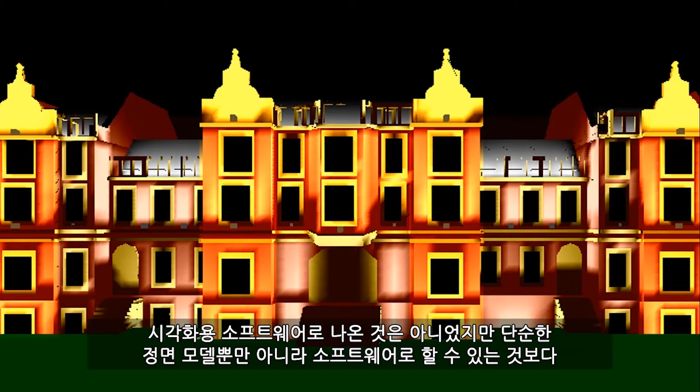We started to push the software a little bit. It was never really intended for visualization, but we started to create simple facade models, or more complex facade models than the software really allowed, because all it would let you do is build square blocks and really basic geometry. So you end up with these sort of Minecraft looking buildings that you build the best you can with the limited geometry that you have.

But again, it was still radiosity calcs. So it was better, and it was a bit quicker than doing it all by hand with pastels and chalks, but still lacking a little bit of depth in realism.

Then fast forward a couple of years, I discovered ray tracing. Ray tracing became a capability in the software that we were using at the time. And this was a game changer for me. I just couldn't believe I'd not come across ray tracing before. It'd been around for a while, but I'd just never come to use it in any software before.

Suddenly it was getting beautiful, accurate looking falloff and light pattern and shadows on surfaces. And yeah, you can see the difference there. It's still pretty primitive geometry, but you're just getting a little bit more of a realistic look and falloff of the lighting. Okay, and we continued to push what we could do within the software.

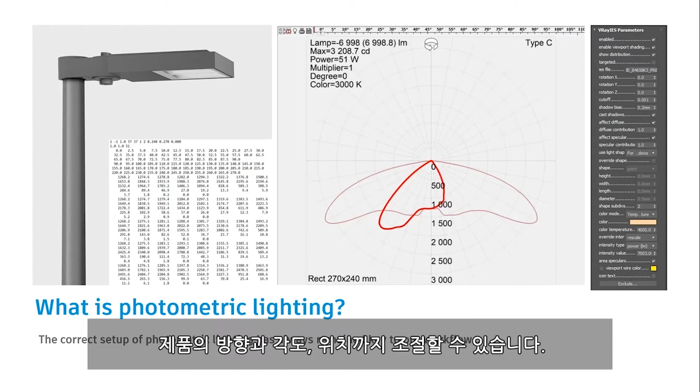Okay, so once we put that into 3D Studio Max, there's all sorts of different elements we can control. We can set up its lumen output, so that's the amount of light power that is output by this light product, and that depends on the different types of lamps being used. Then the color temperature of that product, so it could be a warm color, a white color, or a cool color. And we can also affect the orientation, angle and positioning of the product itself.

So we have guidance we can use, because there are known reflectances of materials such as stone, wood, and glass. And it will vary depending on the type of wood you're looking at or the type of surface finish on that wood, whether it's glossy, satin, or matte, the color of the grain of the wood itself, and so on. And even the age of the wood can affect it. So these are all things that have to be considered.

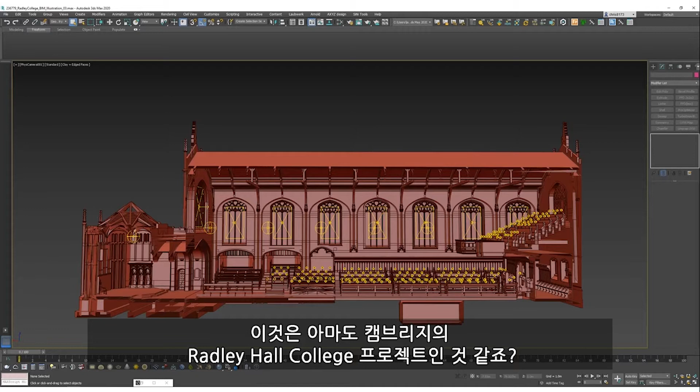But typically, we come across this kind of thing. So this is actually a project, Radley Hall College at Cambridge. Is it Cambridge? That's correct. Yeah. So this was actually a Cambridge project. So we actually sent this model. The model's great. Model's made up of the space once they did a survey of it, but the attempt was

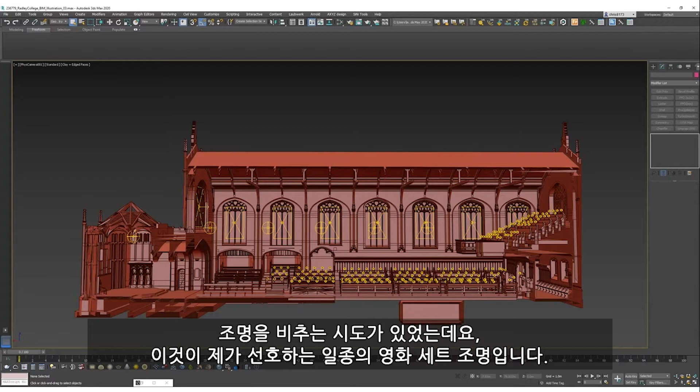made to light it, and this is what I like to refer to as film set lighting. So somebody's made an attempt here, you can see, to put in fill lights that come in from the outside. So there's daylight coming in, and then generally make sure the space is well lit. So you've got those area lights down the center of the space, and then where you've got these little lamps that are on the benches on either sides, again, they've used some area lights to represent each one of these lamps.

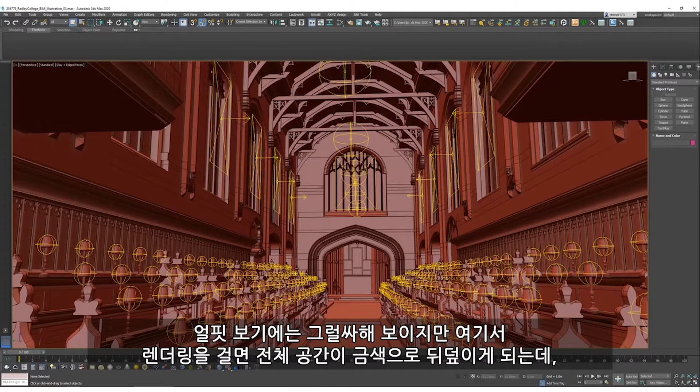And at first glance, that looks okay, but when we take a rendering from that, you end up with quite an overblown space because there's basically just too much light in there. It's not accurate based on where the actual positions of lighting products in that space would be. But then also a lot of that washed out look is because the diffuse settings of the materials haven't been taken into consideration there.

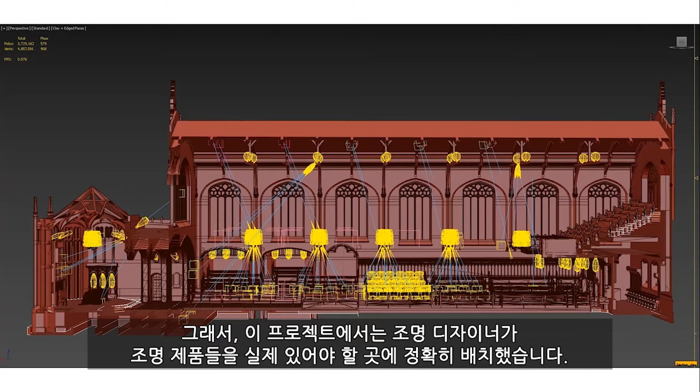So on that specific project, once we've gone through this with the lighting designer and placed products accurately where they should be, you can see that suddenly there's a difference. Everything seems to have a purpose as to where it's being placed. You've got light in the center there, which are aimed at specific parts of the walls. You've got lights on the suspended chandelier products and so on.

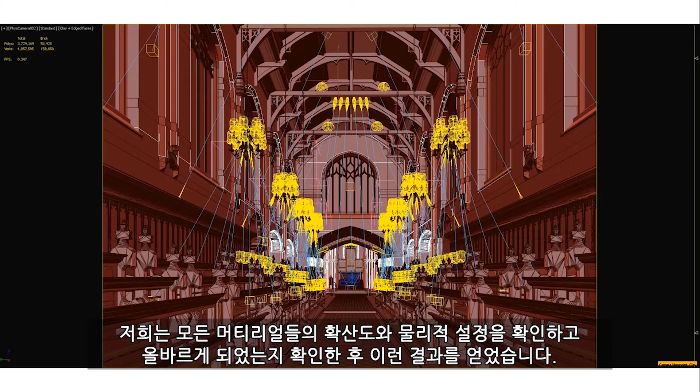And again, we'll also go through and check all the diffuse levels and the physical setup of the materials, and the result that we get once that's been done with everything checked and correct, you can see it's a very different experience of that space, and the representation of that lighting in there gives you a much more believable or a much more accurate representation of what that space is actually going to look like once it's been completed lighting wise.

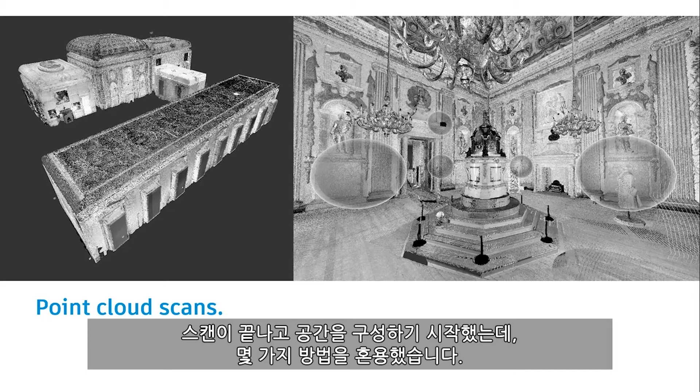Once we had those scans, the next part of the process was to start building up the space. So we did this in a combination of ways when we started building this geometry. Most of this was done by Chris, but the first technique we used was to manually build on top of the point cloud. So it's just like tracing or joining the dots: simple structures and architectural elements in that space, built up using the point cloud as a guide for positioning and heights of extruded objects and geometry until you fill it all in slowly.

Yeah, as you say, it's like tracing, but it doesn't really speed up the modeling process, but it kind of ensures accuracy, I guess. Like you can make sure scales and everything are as they should be.

They should be the correct scales. So it's really useful for detail, like heavy detail on ceilings as well, because obviously you can't get up close to those when you're there in person, but the 3D scan will get that detail for you.

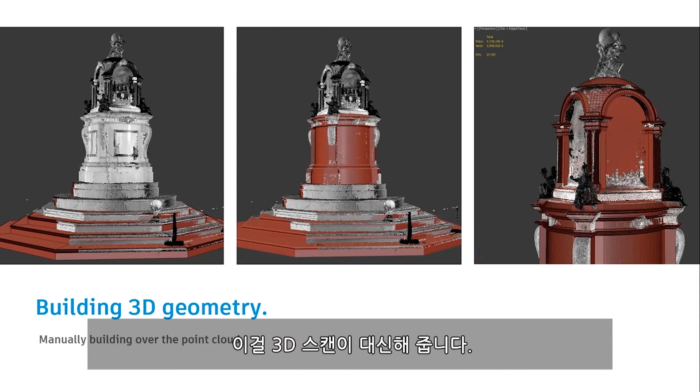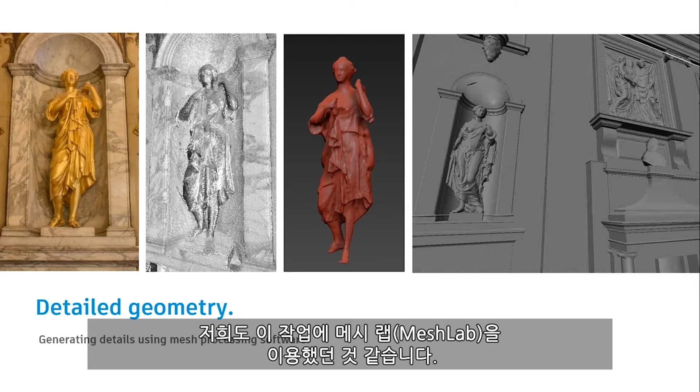That's correct. So as well as that, some of the really heavily detailed items in that space, like that statue, for example, were a little harder to model using the point cloud. So the way those were done was using mesh processing software. I think we used MeshLab for this at the time. Yeah, we did. As you can see, it's quite a dirty method of creating geometry, but it was good enough for the statues there, especially once we applied textures to them, you can barely notice.

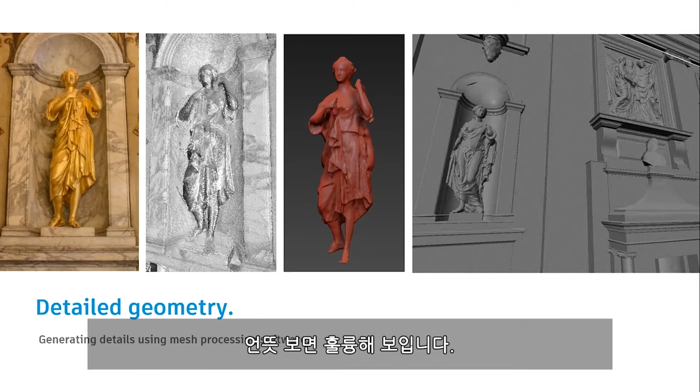You see the statue there on the left, and then you see the point cloud. Obviously, the point cloud didn't capture so much of what was going on behind the statue, or there's bits like feet and things missing. When we ran it through some processing software, we were able to get that clay version there. At first glance, it looks great. If you really analyze it, then you notice things like, oh, there's a bit of foot missing, or there's not as much detail maybe in some of the clothing, etc.

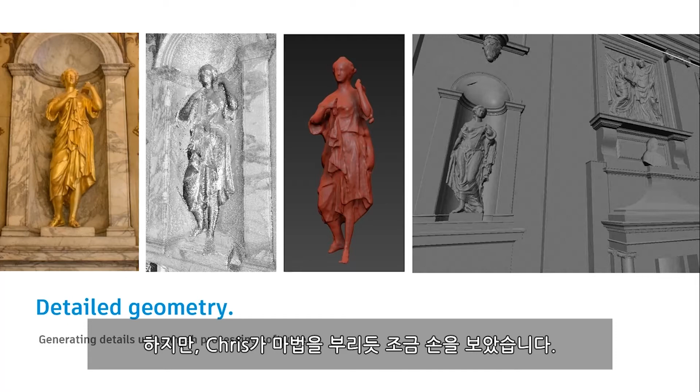But once Chris does magic on it and cleans it up a little bit, and once we have placed the textures onto it as well, then it becomes really quite hard to perceive that there is anything different to the original. And you can see here, this is some of the detail that was on top of that central clock feature in the middle of the space.

Yeah, so as I say, it's quite a dirty model that you get out of the processing software, but just some simple cleanup. It doesn't have to be perfect or accurate. Well, obviously accurate is important here, but like the actual volume, as long as we fill the volume that's there, that's the most important bit. And obviously, depending on where the camera is positioned in the space as well, is kind of how much detail we need to go into. And then we can use textures to add in the extra detail where necessary.

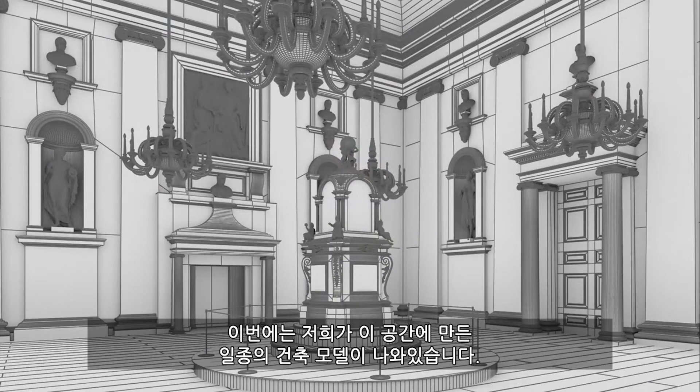Okay, so here you can see the architectural model that we generated then of that space. So we've got all of the base room in, we've got the details in for those elements, the ornaments in the background, the detailing around doorways, and the feature clock in the middle, and we've got the chandeliers in as well.

So from here, the next stage was to put in the materials and build up using a lot of photographic reference for this space. We were quite lucky when we went to the site, weren't we, Karen? Yeah, we actually got a chance to take a lot of photographs for our reference as well, and we were able to take them in a way that the exposure for the images was just right for us to use them as textures as well, trying to remove as much of the existing shadows as possible so we could actually use them.

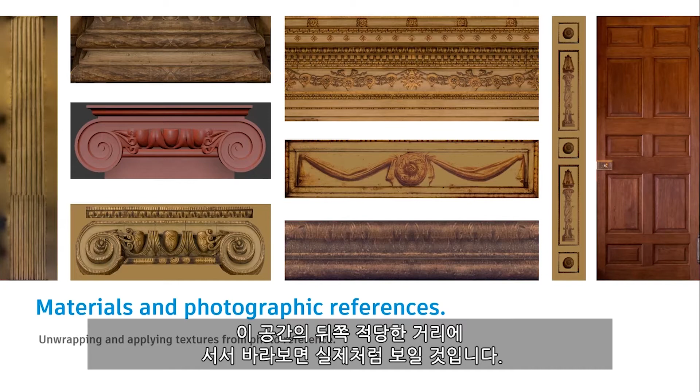And then it was just the process of unwrapping the geometry so we could place the textures on accordingly. And you'd be surprised how much you can actually get away with where things aren't absolutely perfectly lined up. But from a certain distance, as long as you've got them within 95, 98% accuracy, they just look like the real thing once you view them from standing back in the space.

So there's just a few there that we showed you, but there's literally hundreds and hundreds of images taken and hundreds of elements chopped up in Photoshop and placed onto that model. So that's the scene. You couldn't actually go in there and take one image of the entire ceiling. I can't remember how many. It was like 5 or 6 images stitched together, I think, in the end. That's right. To try and get a flattened version of it, which we could use. Yeah, and to try and get as high a resolution map as possible. And then that's just applied to the inside of that ceiling space.

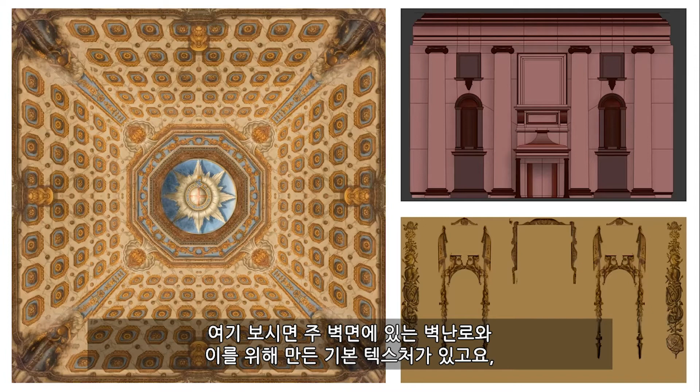Then you can also see one of the main walls in the space there where the fireplace is, and the base texture that was created for that, with all of the painted details on those walls and columns. And meanwhile, while we were getting the model ready and textured, our specialist lighting team was also working on the lighting design for this space.

So if you remember, I mentioned before that the aim of this client was to try and restore the ambience or the feel or the mood in that space back with the lighting to how it would have been when it was originally lit just by candles. So we headed down to Kensington Palace for this candle trial, they called it.

And Chris and I have worked on quite a lot of different types of heritage projects like this, and we know the level of detail that stakeholders and clients can go into when they're making decisions on things for these spaces. They're very sensitive spaces. They're hundreds of years old, and they belong to important people, or they're used for important things. So a lot of time, effort, and a lot of input is required from a lot of stakeholders to make decisions. But this just took it to another level, right?

For us, big deal for them, wasn't it? I mean, it's a really big deal. Like it's the first time they lit a candle in the space for hundreds of years. So exactly. Obviously, though the space was originally lit just by candlelight, and the candles were specifically just on these chandeliers, they can't do that for obvious reasons. That can't be done today. You couldn't have candles lighting up this space and visitors coming in and out. The risks and the hazard that would cause, it's not going to happen.

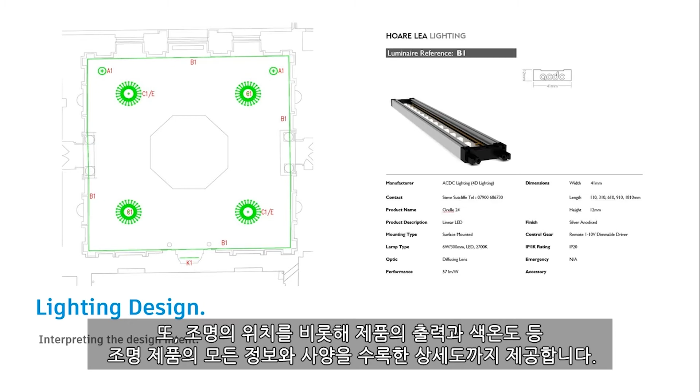So the output, lumen outputs of the products, the color temperatures, etc. So we'll populate that into our model. You can see there's that linear fitting and where it's positioned exactly underneath the ceiling on the cornice at the top.

And this is a really good example of working on something that's bespoke. So the lighting designers worked with the company that was restoring the chandeliers, or there was some repair work to be done on some of the chandeliers, I believe. But they wanted to also integrate this fitting of spots. So there's a ring of spots. It looks like a spider there. You can see it on the left.

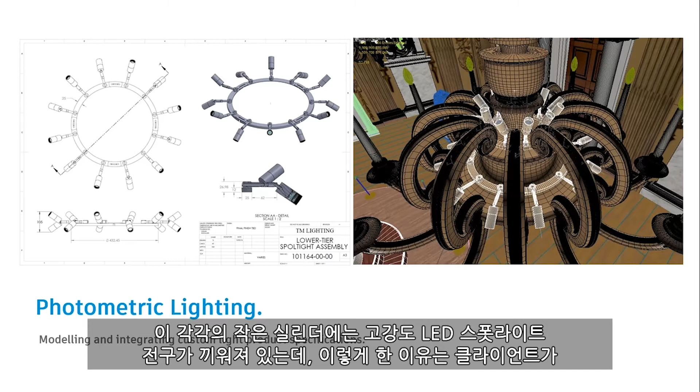And it's colored the same material as the chandelier itself, but then also it's hidden in between those arms in such a way as to hide it best we could. So each one of those little cylinders that you see holds a high intensity LED spotlight.

And the idea for this was because they wanted to make sure that there were no spotlights to light all of those statues and busts and pieces of art that were around the space. They wanted to make sure there was nothing visible or mounted onto any of the surfaces of the architecture. So by hiding them on the chandeliers, you could aim them at different elements.

So here's a drawing that the lighting designer gave us saying, okay, we've got 4 chandeliers and we've got these rings on each chandelier. And this is sort of where we want to aim products to. So Chris and I had a great time trying to figure out which arrow points where and where it comes from. But we did a rough setup to point best we could these spots from the chandeliers to those particular different elements within the space.

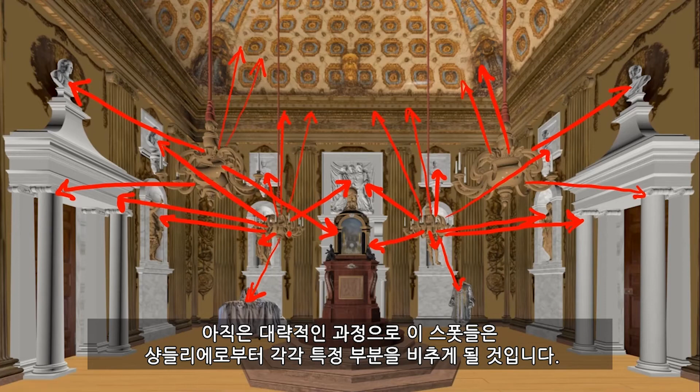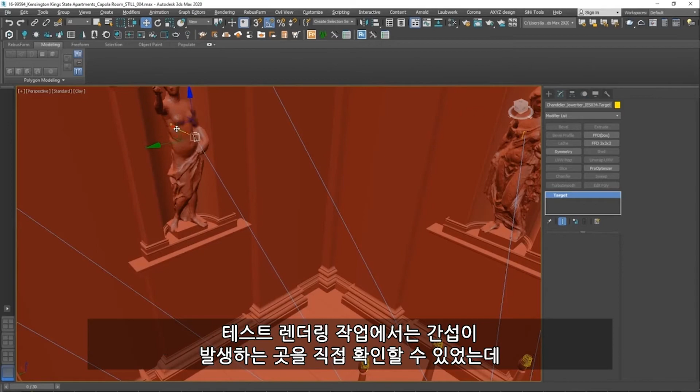Here's a video showing how that works. What was really good about doing this in 3D Studio Max was that once we parented up the light fitting to the spot, you can see it follows wherever we aim it, but we could position it and aim it towards a statue, for example.

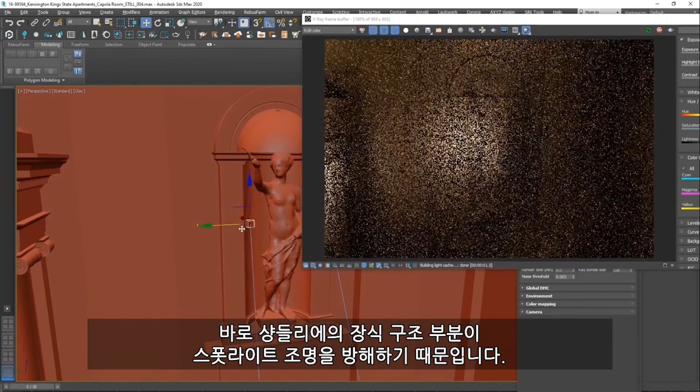And when we do a test render, then we could straight away see whether there was clash happening, i.e. is there an arm of the chandelier that's intersecting this light beam, and you can see there's a dark shadow on the side of that statue there, and that's being caused by one of the arms of the chandelier blocking the light beam from that spotlight. So yeah, you can see the image there as well that shows it.

So this way we were able to then choose a different position or a different spotlight from one of the other ones. Maybe we choose one from a chandelier across, or just one from the next arm down. So from that we were able to work through all of those spots on each chandelier and figure out exactly which position we needed to place a spot and what angles of aim we needed to set it to light just the required elements of statues and artwork in the space without causing shadowing from the arms of the chandelier itself.

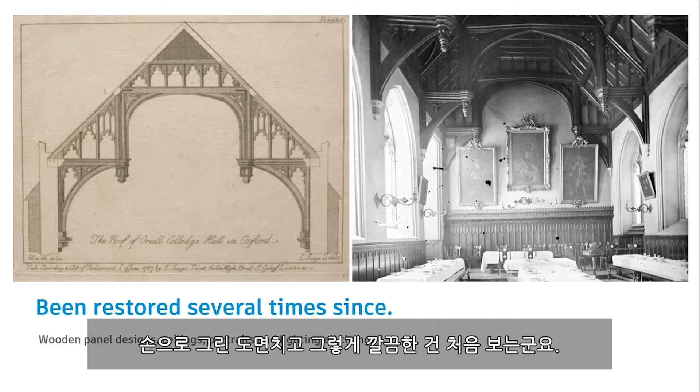And there were some great ones for this one, weren't there, Chris? Yeah, some fascinating ones. I can never read the handwriting because it's always so neat. Not like my handwriting, unfortunately. Everybody could write in calligraphy back in the day, couldn't they?

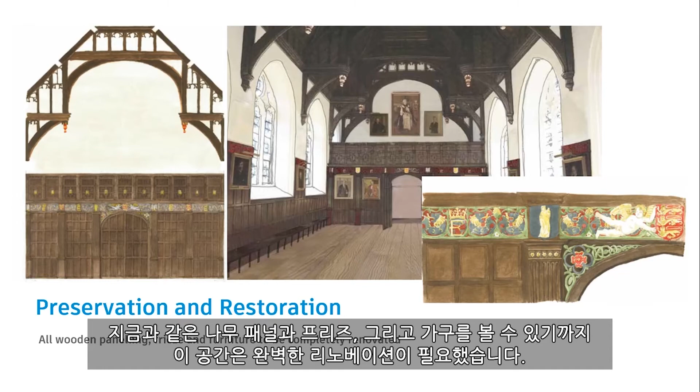So concepts were drawn up by a couple of architects, actually, of how this space could look if it was preserved. The wooden paneling as it is now, the frieze and the furniture were all going to be completely renovated. Also, they were going to rehang all the portraits, actually taking down quite a lot of the clutter on the walls and reducing the number of portraits in total in the space, but also bringing them down so that they're more eye level, so people can actually see some of these portrait paintings.

As well as this, there's going to be an updated lighting scheme put in, mainly to focus on hiding as many of the fittings as possible for minimum visibility, to make it a bit easier to maintain as well, because some of these fittings are so old. It's quite difficult to get the actual parts to fix them if they do break, and also to provide a better quality of light in the space as well.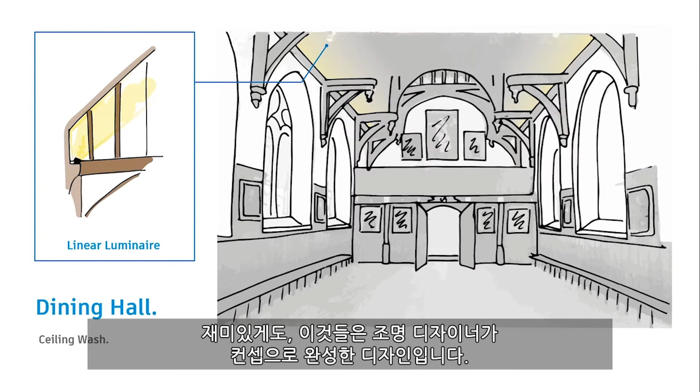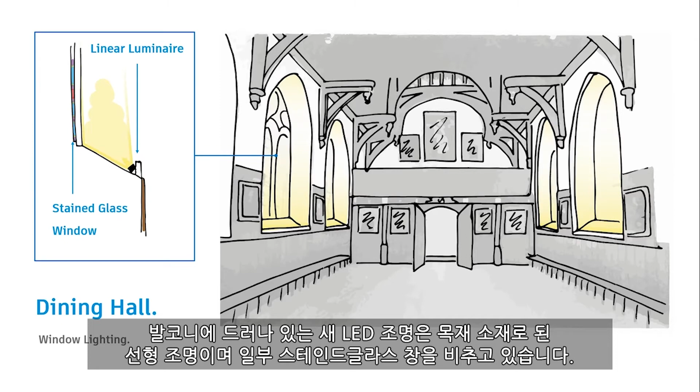So just for your interest as well, these are some of the designs that the lighting designer came up with conceptually. So they wanted to have a ceiling wash in there, some new LED picture lights, LED linear fittings to bring out the timber details on the balcony, and also to bring out some of the stained glass windows too, as well as actually having some proper task lighting, some downlights to actually illuminate the floor.

Also, as I mentioned before, task lighting was quite a big thing for them, because at the moment they have lamp fittings on the actual tables, but they're hardwired in, so they can't actually rearrange the tables in the room at all. So the idea is that if they have a battery powered table fitting, they could rearrange the tables and use the space for other things other than just sit-down meals. They could have concerts or exams in there. That's what they really wanted to do. They wanted to repurpose the room.

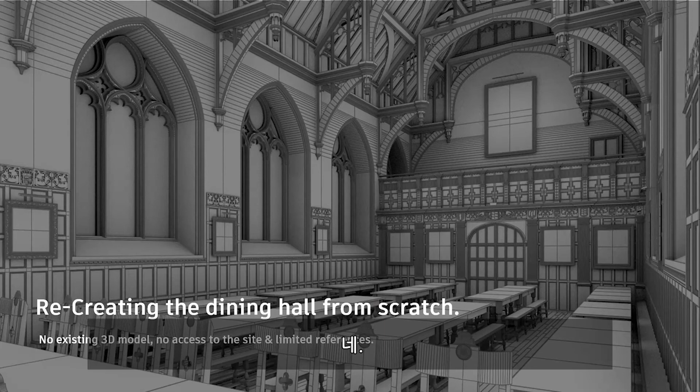Yeah. So when it comes to recreating the dining hall from scratch in 3D, it was quite a challenge for this job in particular, because we did this project at the beginning of lockdown with COVID-19, so we couldn't actually go to the site and see it, which, for doing lighting visualization, is really handy, to go and see it with your own eyes. Unfortunately, with this job, we had to deal with whatever we had in terms of reference photographs, which were generally taken on mobile phones.

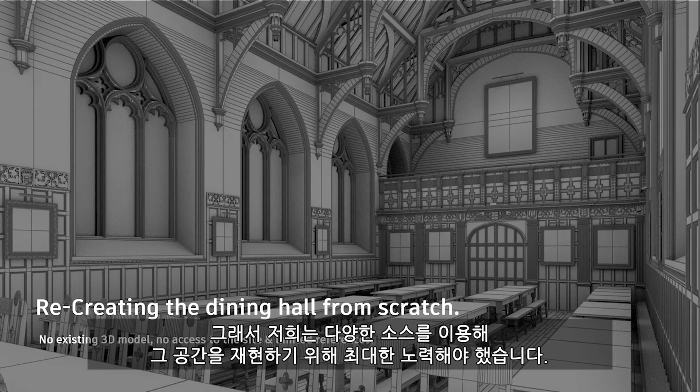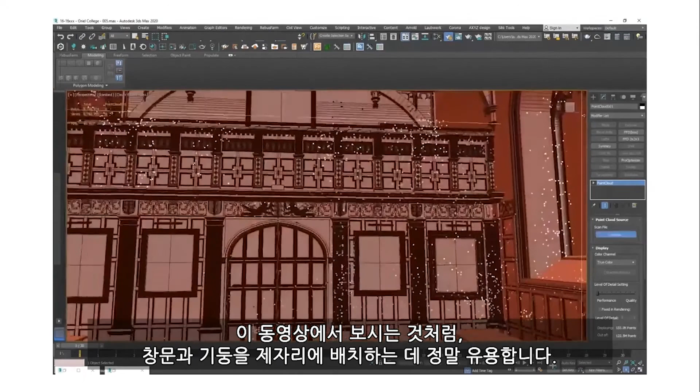And no offense to the people who take them, they're not photographers. They don't really know how to balance exposure and white balance and all that stuff. So we had to use a number of different sources to try and recreate the space as best we could. Thankfully, we did have a point cloud given to us, which really helped with getting the sense of scale correct and making sure the details, especially on the ceiling level, were just right, the right size and positioned correctly. As you can see in the video here, it was really useful for getting all the windows and the columns in place.

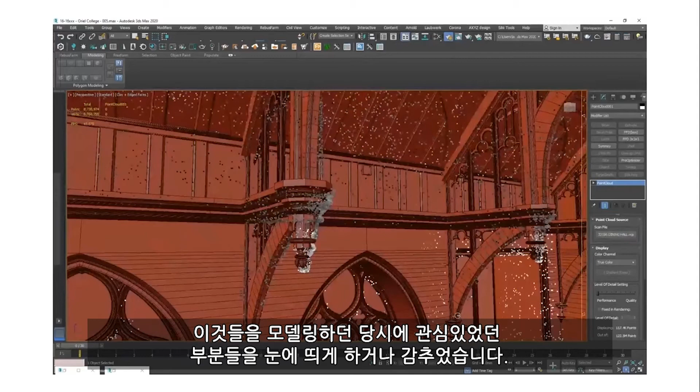It's interesting to see where all the old pictures were in the scans as well, as you can see them there just floating around, but obviously they got moved. So it's kind of a weird thing to see. It's worth mentioning as well, before we bring the point cloud in, we use Autodesk ReCap Pro to clean up some of the point cloud. But then we use a limit box in Max to show or hide just the areas that we're interested in at the time when we're modeling these things. It's great for that, especially using the limiting box, you can isolate and concentrate on just a particular element that you're working on. Yeah, it's really handy for those little detailed areas, especially the frieze area.

But then we moved onto creating the materials, which again was another challenge of not being in the space. I think it was quite crucial for this one as well, wasn't it, Chris? It's always crucial for these kinds of projects to recreate the materials as accurately as you can. But here there was quite an emphasis on restoring some of the damaged materials, and also there were some new materials or choices to be made on paint finishes and colors. Yeah, absolutely, and that was crucial for them. It was indeed. The challenge was, as I said, the photo references we were given. They're all different, varying levels of focus and exposure, so it's hard to nail down the existing materials first, which I thought was very important. If we get the existing materials done first, we could then adapt those to look like the new materials, for example, the wood that we had to create here.

We created the scene and then mimicked the lighting in the photographs we had received, which is kind of like an overcast daylight, and then recreated the existing wooden material first. And when we do that, we have to take into consideration how the light's going to react with that material. So as you explained earlier, there's all different types of diffuse reflectances for different materials, and for wood in particular. And then we also have to consider the surface texture and the bump of that texture and the glossiness. It can't be overdone. It has to be just right.

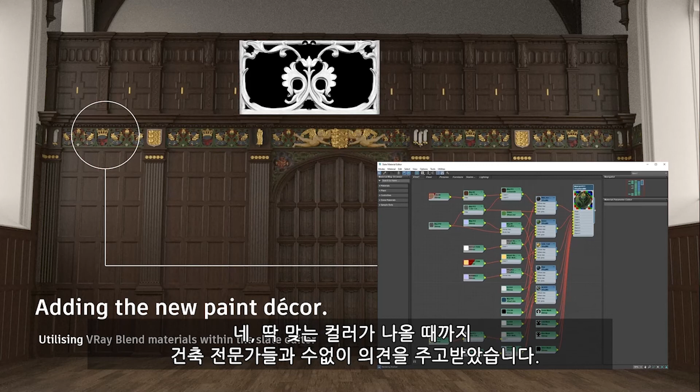So the artist gave those concepts of what it should be, but once they saw them in situ with daylight falling on them, up against the wood finish, with artificial light, there was some tweaking that went back and forth where they changed for a light shade maybe, or a dark shade. There was quite a lot of backwards and forwards between the architects and ourselves until we got the color right. So that's why we created the material in this way, using masks to mask off the areas of the frieze which were going to have different color features, and using a blend material in the slate editor in Max. It was very easy and quick for us to change if needed.

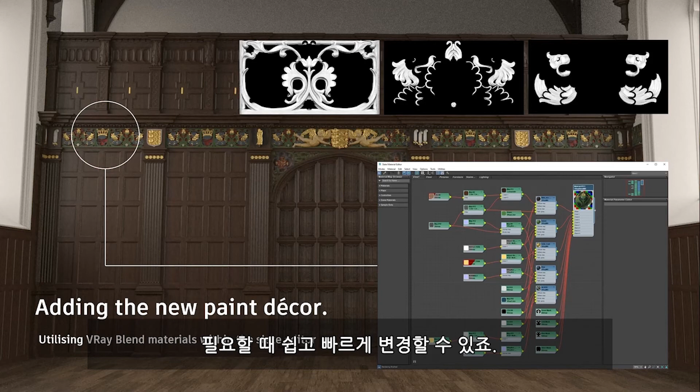So at this stage, we were ready to start placing the photometric lighting into our scene. Very similar to how Kensington worked, we had a lighting design specification supplied to us, and we were able to source the correct photometric webs, or IES files, as Karen mentioned earlier, to accurately show the exact fitting in the space. We placed each set of lights around the room, ensuring that all the outputs were correct and the color temperatures were as the lighting designer intended, and making sure they were all aiming in the right place.

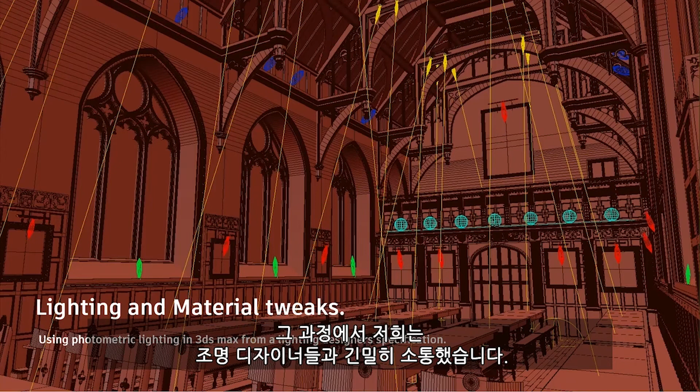But we did this very interactively with our lighting designers. We like to share our screens with them quite a lot. We open up the interactive rendering, and we like to make changes or try new things there and then, or change the positioning or targeting of lights to see how the effect will come out. It's a really useful feature to have for them, and it's good fun actually to play about with this with them as well.

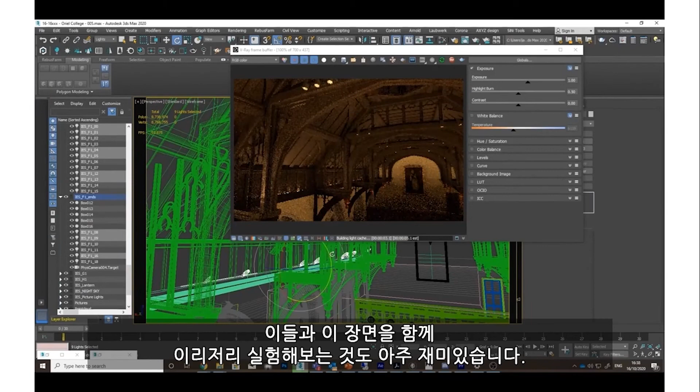Yeah, when lighting designers work in this way with us, they absolutely love it, because traditionally, firstly they can't render, and they can't produce models or geometry to this level with the lighting calculation software that they use. But also they cannot get a demonstration of what these small changes do, just moving the position of a light or increasing its color temperature or its output or halving it. They can't get that instant feedback with the tools they're used to using for lighting calculation.

So they absolutely love it when we can show them their space in this way and let them design on the fly and make those decisions, choices or changes on the fly. Yeah, it's like the holy grail for them.

Yeah. So this is actually a draft render that we sent to them. We had tweaked the wood material slightly to make it a bit more restored, but they did feel it was still a bit too dark. So we had to go back and make some more changes to ensure that the wood elements were as they should be. We had to make it a lot lighter, and also change some of the picture sizes and locations as well. Because they intentionally wanted to lighten the wood on certain elements in this space from what it originally was, didn't they? They did, yeah.